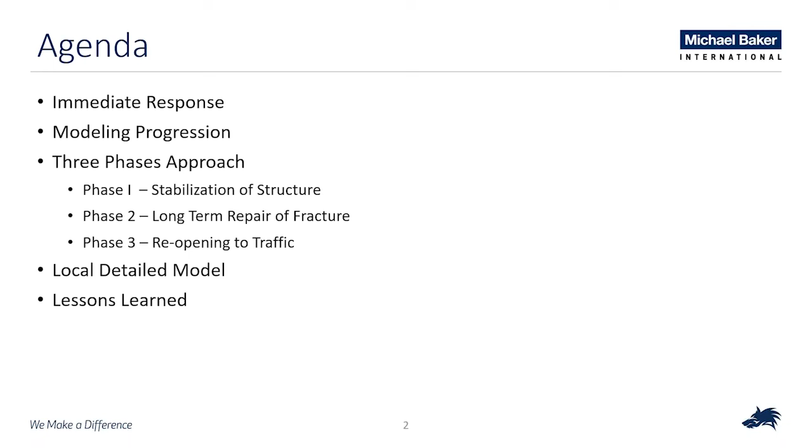So just the short version of the story. The Hernando De Soto Bridge is a 2 continuous span tied arch that carries I-40 over the Mississippi River. On May 11, the hangers and arch inspection team discovered a fracture on the north side of the tie on the Tennessee span. That fracture is about 70 feet west from the middle of the pier.

So if you look at the pictures, the outside web and the top cover plate of the tie are completely fractured. Then part of the bottom flange was fractured. Also on the inboard side, the top cover plate is unzipped from the inside web. Then the cross section of the tie is kind of warped and misaligned.

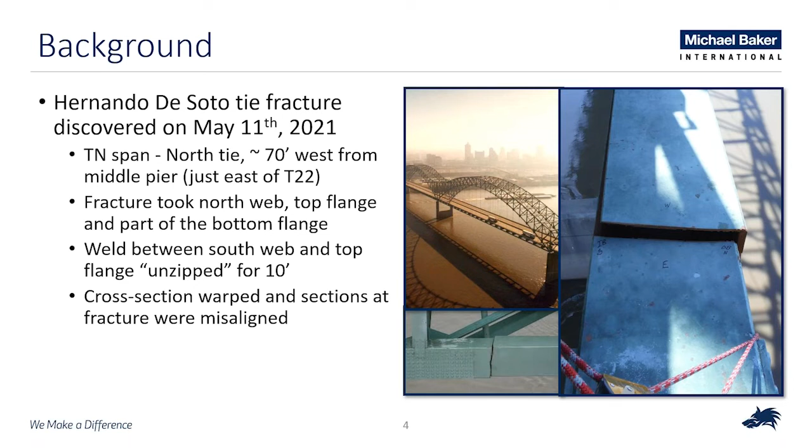So the inspectors recognized the criticality of the finding. They alerted the team of the situation, notified the client, and most importantly, quickly closed the bridge. Although Arkansas DOT is responsible for the inspection side of the contract, Tennessee DOT is responsible for the maintenance and repair of the bridge. So they retained Michael Baker as the engineer of record to do the emergency repair because of our previous experience, and our inspection team was readily available on the site.

So all parties acted swiftly, and the information was coming from different angles. But we managed to establish a three-phase approach to repair this bridge. First is to evaluate the fracture situation, and most importantly, to stabilize the structure. Then phase two is to have a permanent repair of the fracture. And lastly is to inspect and assess if other locations of the tie have the same fractures or not.

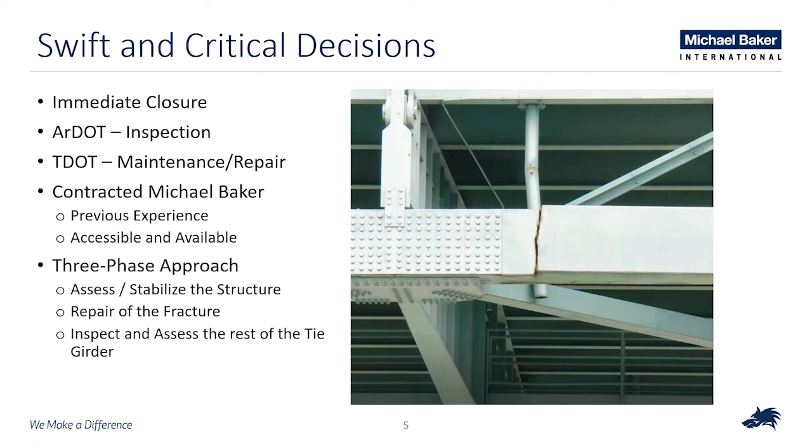So Michael Baker was able to put together an emergency response plan. Actions taken in the first 24 hours were essential to get us headed in the right direction. So we started to gather all the data that we could access: bridge plans, shop drawings, design drawings, and inspection reports, models that had been done, test data, and some old construction pictures.

Then we mobilized the team. This required a large team to work on it. So we have an analysis team, we have the phase one repair team, as well as the phase two repair team. And other activities going on: we have the management keeping continuous communications and meetings with the owners. And we also have the BIM modeling team that develops graphics for PR purposes.

So I just want to give you a sense of how urgent it is. Within a week of timeline, there are so many activities and decisions being executed, including closing and opening the navigational river traffic, and we have the draft plans, we have the CMGC contract advertisement, and selected Kiewit as the CMGC for this bridge repair.

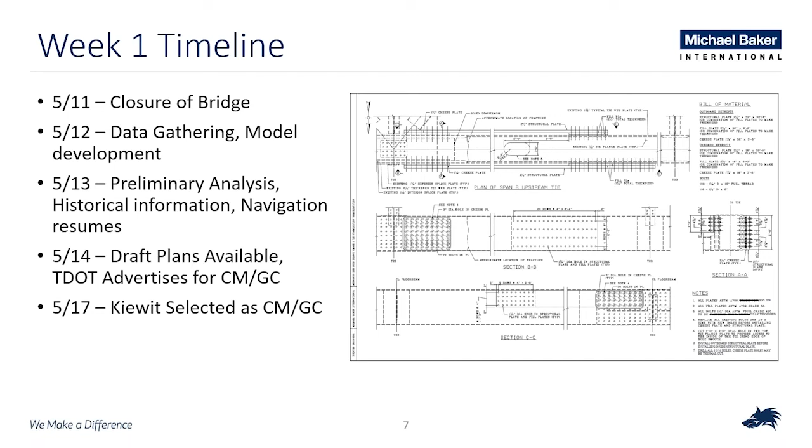As I mentioned, we recognize how aggressive the schedule is, as well as the importance of the work we were doing. So I want to say that this is really a team effort, and analysis is an important piece of the work. Within the analysis team, we subdivided into two different teams. One, we have the MIDAS team, and within the MIDAS team, we have a modeler for the global model, as well as to develop the local model, and also investigate other parametric studies. Then we also have the independent model, to have good comparisons to the MIDAS model to increase our level of confidence in the work we did.

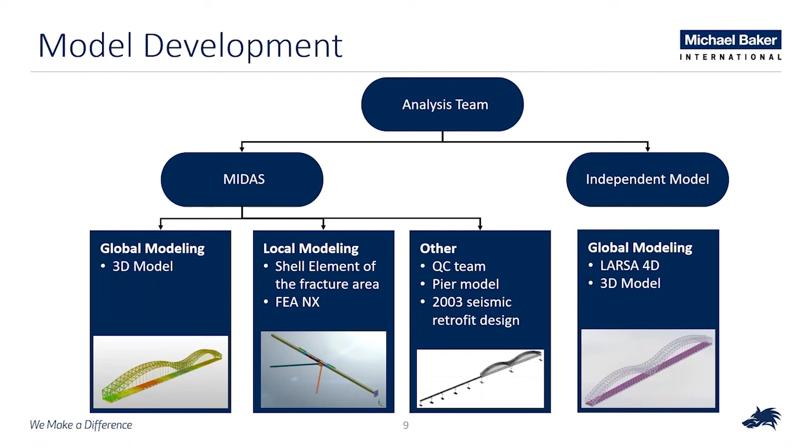So on the model development, we start simple. We start with the 2D model because we have easy access to the existing plans to extract the geometry and input into MIDAS and create the simple 2D model. Starting 2D is good because it's easy for us to troubleshoot and debug the model, just to get us in the right direction. If we have a more advanced model, it's really hard to troubleshoot. Then we use the 2D model to check against the existing drawings and the forces and stresses, to make sure that we are actually capturing the correct behavior of the bridge.

After that, we expanded the 2D model into a 3D model. And we also compared the design drawings with the shop drawings and incorporated any discrepancies between those two sets of drawings into the model. Then we did the steel dead load calibration to reasonably match the total steel weight shown on the drawings. Based on the information we found in the old construction pictures, the bridge was originally constructed with temporary shoring. So we felt that we are capturing this correctly by just turning the gravity on and not doing more complex staging of the model.

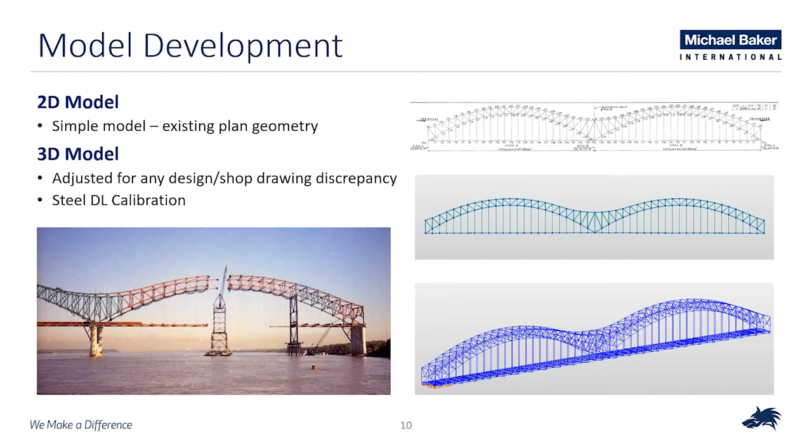The bridge went through a major rehab in 2003. The bearings of the arch were replaced with friction pendulum bearings, and some of the members on the ribs as well as the floor system were strengthened. So at this phase, we had to stage the model to capture those retrofits. And then we recalibrated the dead load of the model to match the total steel weight shown on the drawings.

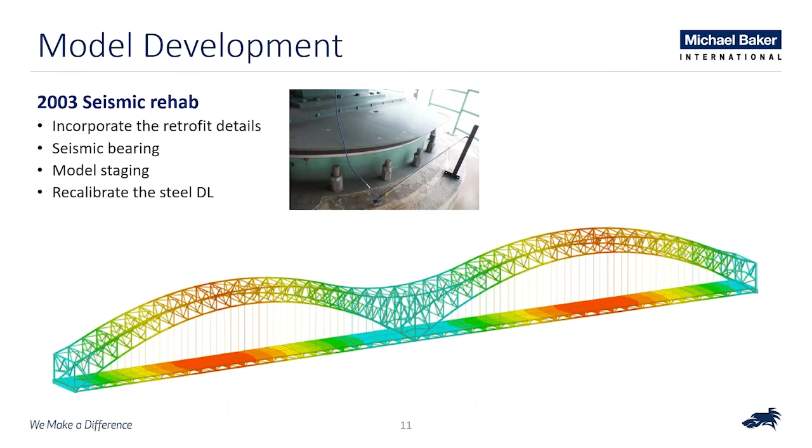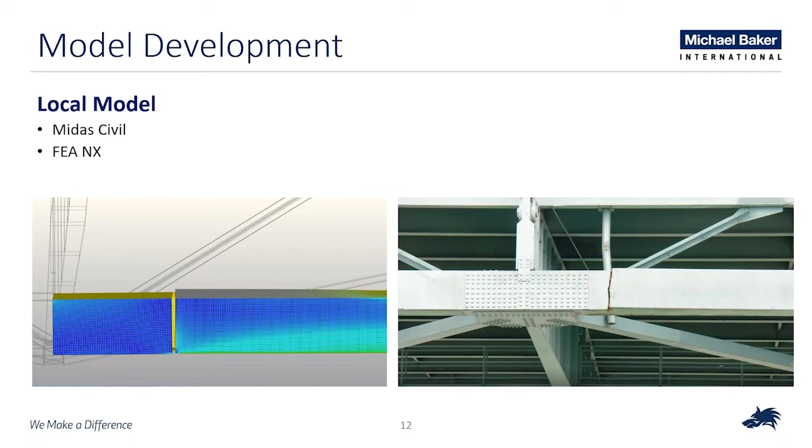Then we also have a local model. We started the local model with MIDAS Civil, but this is a very unique scenario where we hit the limitations in MIDAS Civil. So we had to use FEA NX to do the local modeling, which Francisco is going to talk about. Other than the analysis side, we managed to use MIDAS Civil to export the model into a DXF file for the BIM team to import into their program to do the rendering that was used for PR or media purposes.

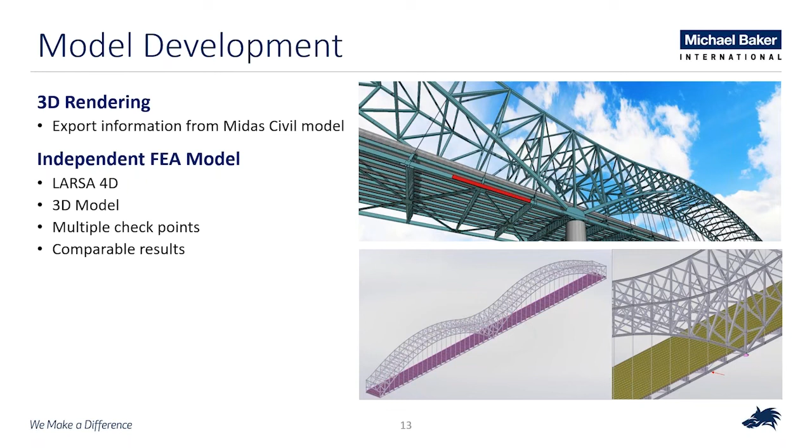I mentioned that we have another team that developed an independent FEA model. The goal is to have the two models running parallel to each other and cross-check each other to give us more confidence in the analysis that we perform. So we had a few checkpoints along the progress to compare the results between the two and reconcile any differences in the assumptions and results. As we know, every program, every model has its own nuances, but we still got very comparable results between the two models.

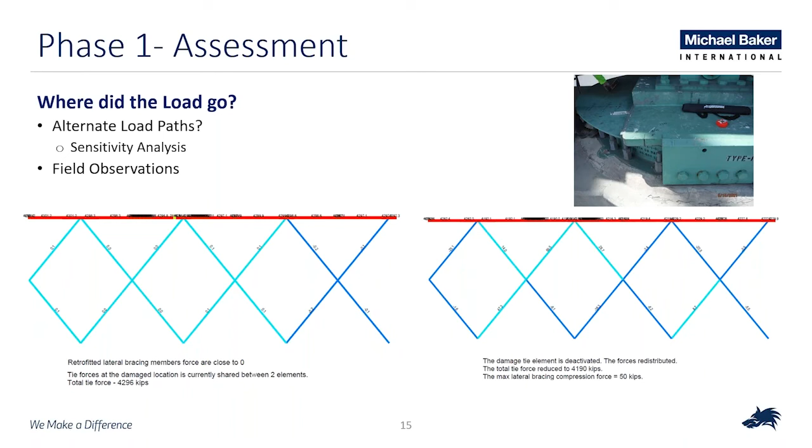So now I'm going to get into the phase 1 repair. In phase 1, we did the assessment to figure out where the load actually goes when the tie fractured. We felt that when the tie fractures, some of the load may go into the floor systems. So we did a sensitivity analysis to evaluate where the load actually goes. Then we also did some field observations, especially on the friction pendulum bearing, to see if the bearing moved or not after the tie fracture.

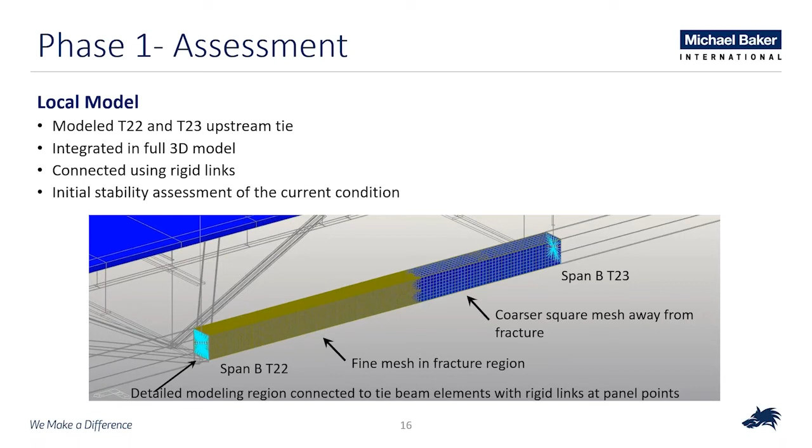Based on what we observed from the initial stability assessment, we can see significant deflections visible in the model that correspond to what we have seen in the field. The deflections due to dead load are not random, where the fracture surface bowed out. That indicated that we captured reasonably accurate boundary conditions in the detailed model, and our material nonlinear analysis of this local model is reasonably accurate as well.

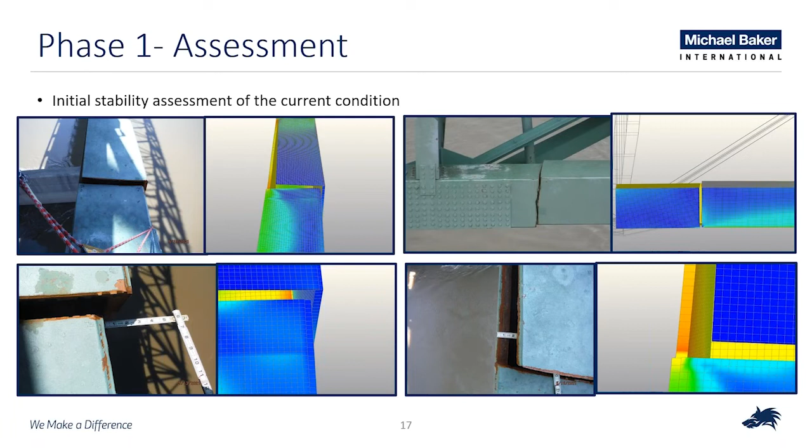So in phase one, the repair is to install a temporary plate over the fractured member, just to stabilize the bridge before the design and construction of the permanent repair.

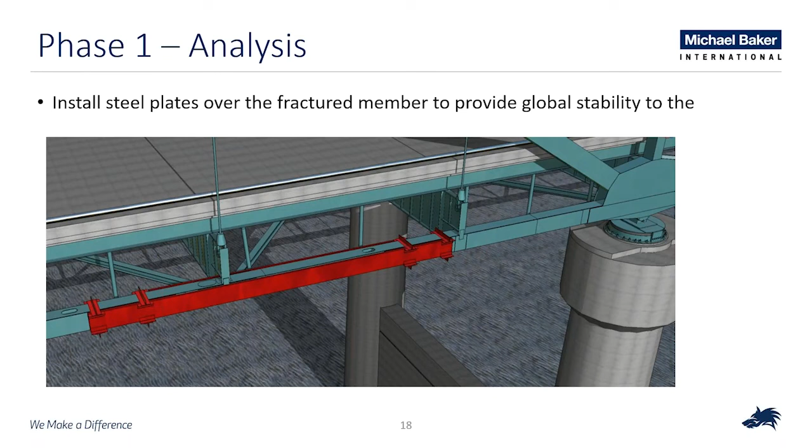In order to facilitate the installation of the temporary plates, the contractor was going to install a working platform underneath the deck on the floor system. So we also added in the platform loading, to make sure the additional load induced into the tie would not exceed the safe load that we determined.

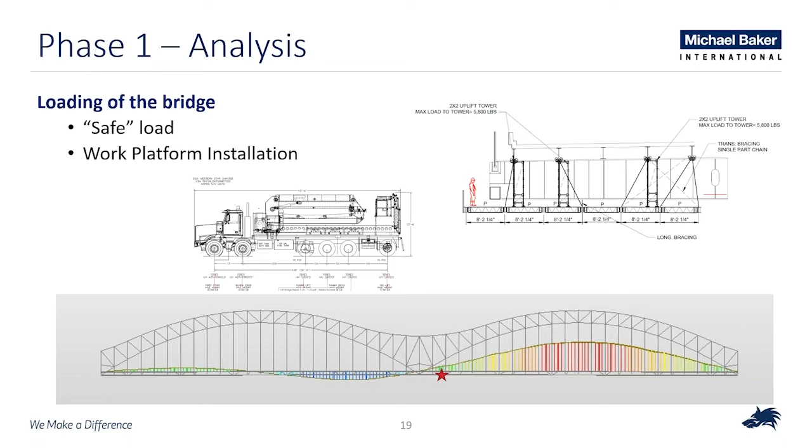Other than that, we did some construction support analysis with the contractor's means and methods to install the plates and how the contractor would like to do the hoisting. Those were all additional dead load analyses that we added into the model, to determine that those loads would not exceed the safe load we had determined.

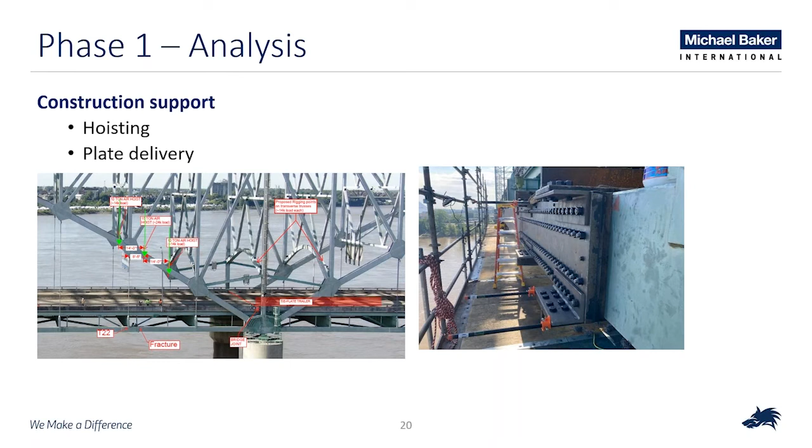Next is the phase 2 repairs. This is when we do the long-term retrofit of the fractured sections. There were a lot of ideas and repair options considered for the permanent repairs, including replacing the whole fractured tie. Unfortunately, we don't have enough time to go through the options one by one, but after working with the owners and contractor, the final option is to plate both sides of the tie girder with the existing tie to remain.

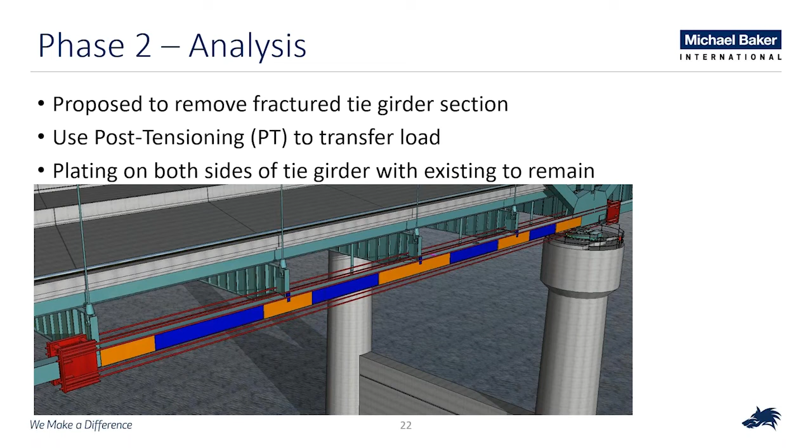The plating starts from panel point T20 to T24, where the fracture is actually located at T22. Post-tensioning was also used to detension the tie and transfer the load from the existing plate to the new plates. So I want to talk a little bit about the design criteria of the plating.

The objective is to post-tension the tie to a reasonable level so that the plating can be installed to the existing tie, and also to restore the fractured tie that warped to its original geometry. To give you some sense of the magnitude of forces on the tie: the tie dead load is about 4,300 kips, and we target to PT about 3,000 kips out of the tie. So then the net stress in the tie is only 30 KSI.

The post-tensioning is also limited by the drag force, which I will explain later. The drag forces are the forces on the tie outside of the post-tensioning operations. The reason we want to do the post-tensioning is to restore the geometry and give everybody a more comfortable environment to do the plating. The new plates have plenty of reserve capacity under the LRFD design.

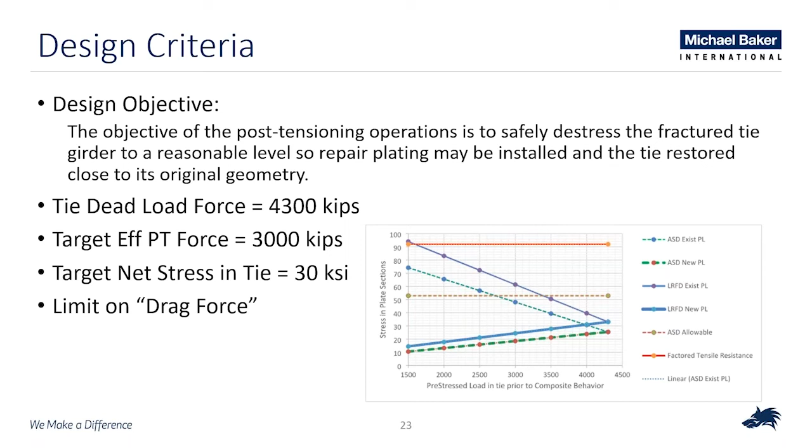So to help the plating design team, we ran the analysis, the dead load and live load analysis, and provided those demands to the plate design team to design the repair.

In addition to that, we also did more construction support analysis. Like we mentioned before, there were more platforms installed on the bridge to facilitate the erection of the plates. We also did some sensitivity study because the lateral bracing is in conflict with the new plate installation, so we had to run the analysis and come up with a temporary bracing system for the contractor to brace the bracing.

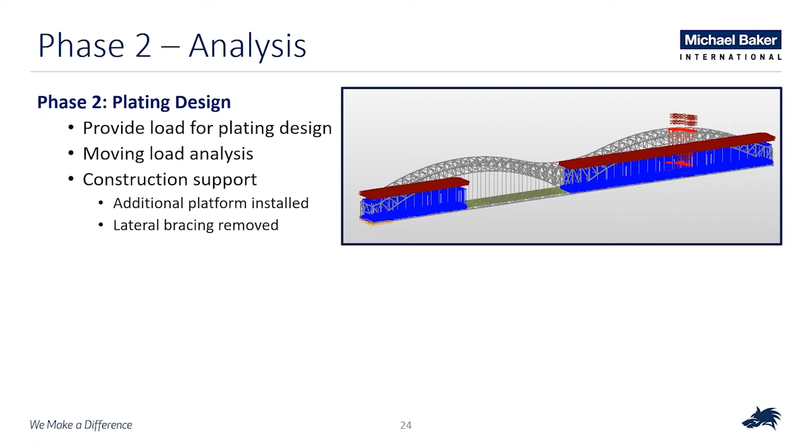So other than providing the loads to the plating design team, we implemented the post-tensioning operations into the model and ran the PT analysis. We modeled the PT rod as a truss element and applied effective PT forces to it. That's where we can look at the drag forces and how efficient the PT is on the bridge.

So using this model, we also developed what we call a PT cookbook. Basically, it is to bound the solutions between the rigid and flexible model, and develop a plan and a chart for the PT field crew to use.

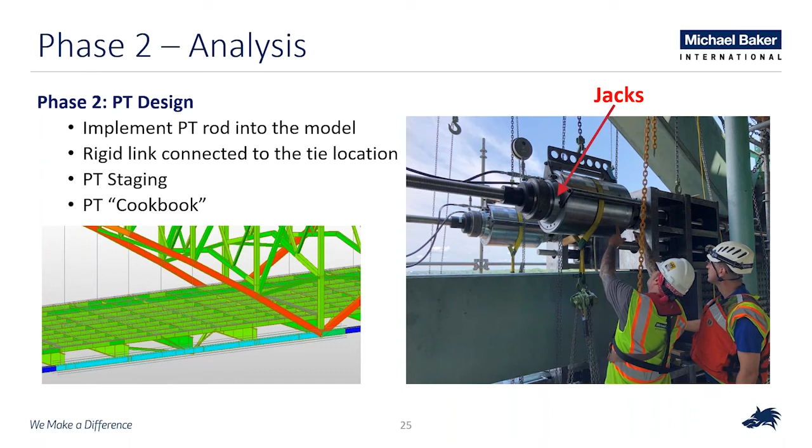In addition to that, we also developed a local model using MIDAS Civil for the PT waler and weldment. The model is to evaluate the stresses of the weldment, just to make sure that the PT operation does not overstress the weldment. So just to give you a comparison of how it looks in the MIDAS model, as well as what actually is in the field.

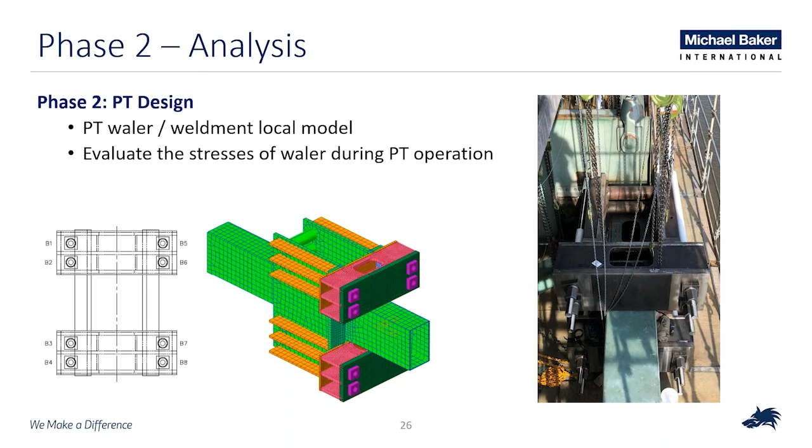So before the PT operation and monitoring, the strain gauges and the dynaforce sensors were installed at the field location of the bridge. The PT operation was actually scheduled on the weekend, if I remember correctly. During the PT operation, the analysis team was on standby mode. We had every model that we use ready, in case additional analysis was required, so that we could quickly make the evaluation if something unexpected had occurred.

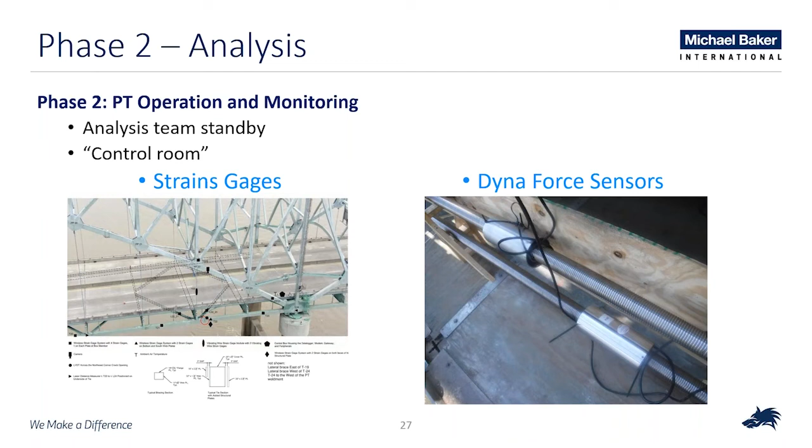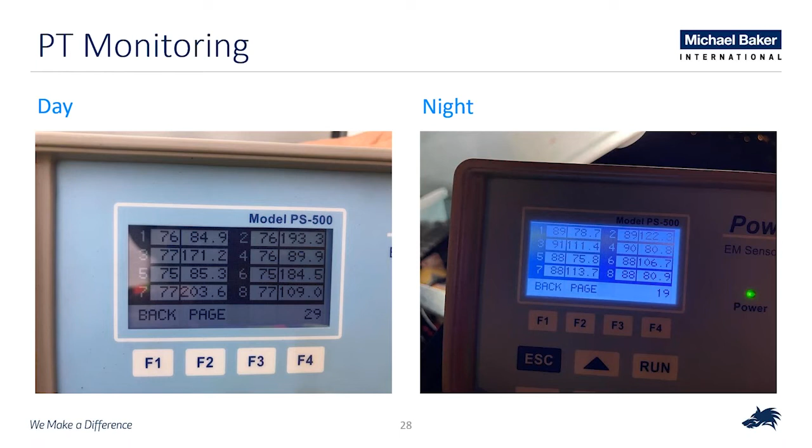So the analysis team acted like a control room, monitoring the strain gauge readings on the tie. You can see these are example pictures of the dynaforce reading of the PT rod. So it looks like we were prepared for everything, but we were not. We under-predicted the stiffness of the structure.

So we under-predicted the stiffness, because in the strength limit state, for the boundary condition, we modeled the ribs as pinned, and the floor system, the floor beam-stringer connections and the floor beam connections, as pinned. But in reality, in the service condition, they have some rotational rigidity.

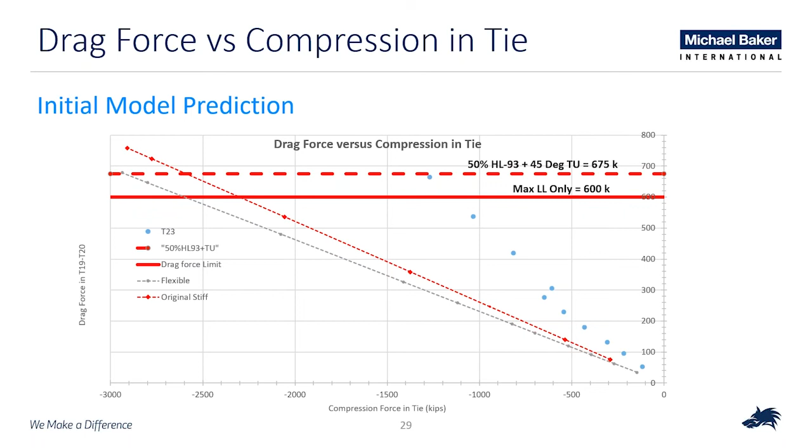So because of that, we quickly adjusted our model to capture the rotational rigidity of the connections, pulled out the results and replotted the graph, and compared to the actual readings in the field, it is reasonably close.

But we had to stop at the 600 kips drag force limit. The reason is that the real, actual load that we think will be on the bridge is 600 kips. In addition to that, the objective was to restore the original section of the tie, and part of the load was already transferred from the existing section of the tie to the new plates. And we met the objective. So that's why everybody agreed with the decision to stop the PT at 600 kips drag force.

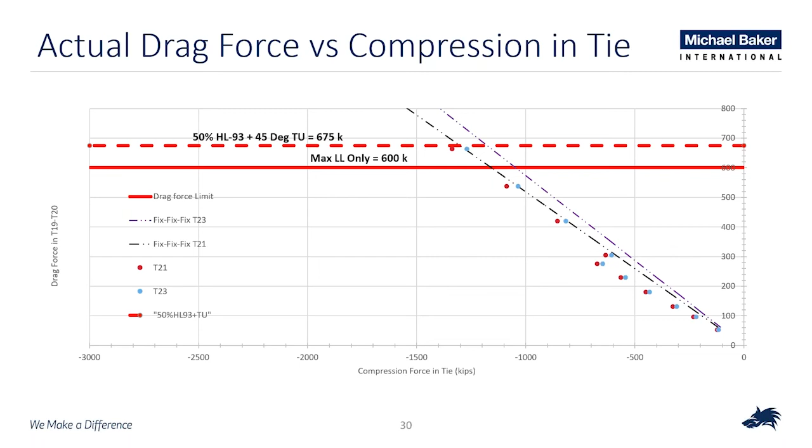So for the phase 3 repairs, the analysis team played a minor role. We basically provided the dead load and the live load, as well as the seismic load, for the plate design team to evaluate and design the plates needed at other locations of the tie that might have fractures. Yeah.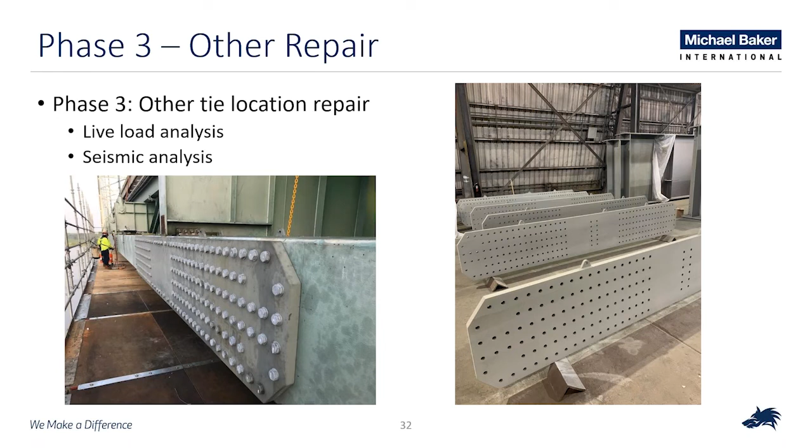And now I'm going to turn it over to Francisco to talk about the advanced level local assessment.

Okay, can you guys hear me well? Yep, we hear you. Okay, well, you can go to the next slide.

Okay, so the reason why a local model was developed was because there were a number of local concerns around the area where the fracture occurred in the tie. The first concern is that there was extensive yielding on the remaining section. A preliminary design calculation estimated that after losing the top and bottom cover plate and the outside web, a typical design calculation would have concluded that the rest of the tie would have failed under its own self-weight. So obviously the tie didn't completely fail, and we were wondering how much capacity was actually left in that intact plate.

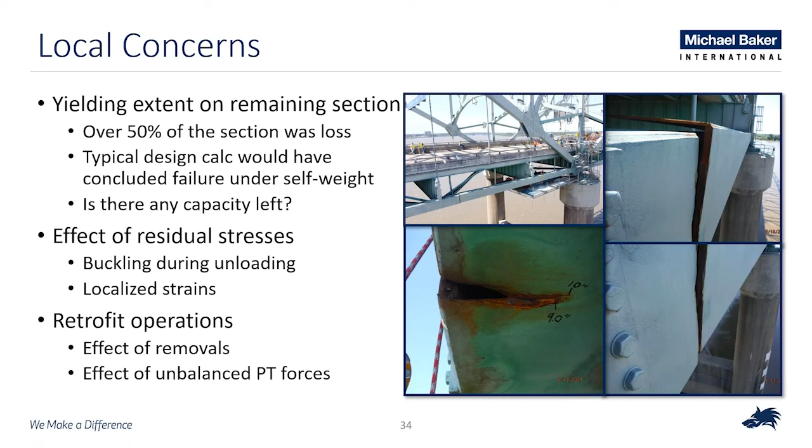And then finally, we also wanted to look at the local effects of the retrofit operations, whether we were going to remove a particular gusset plate, or if we decided that it was necessary to detach some of the bracing from the tie and the floor beam, what was going to be the effect on that area where localized plasticity has happened. And we also wanted to look at what would be the effect of unbalanced PT forces during the operation. So if you want to go to the next slide.

Okay. So why wasn't the local model fully done in MIDAS Civil? Why was FEA NX used? The reason is that we needed an incremental analysis. That is, we needed to include all the construction steps. We needed to start from the scenario where we have the dead load in the tie, and then add the different retrofits, add the different post-tensioning, and see what was the response of the system to it in a sequential manner.

Within that, in order to estimate whether any sort of local instability is going to occur, you need to incorporate large deformation theory, or nonlinear geometry. And you also need to include a nonlinear material model. You need to include the effects of plasticity in order for those residual stresses to form. Within MIDAS Civil, you cannot really successfully do these three things together. So that's why we went to this other tool offered by MIDAS, FEA NX, that allowed us to do this incremental, fully nonlinear analysis. So next one.

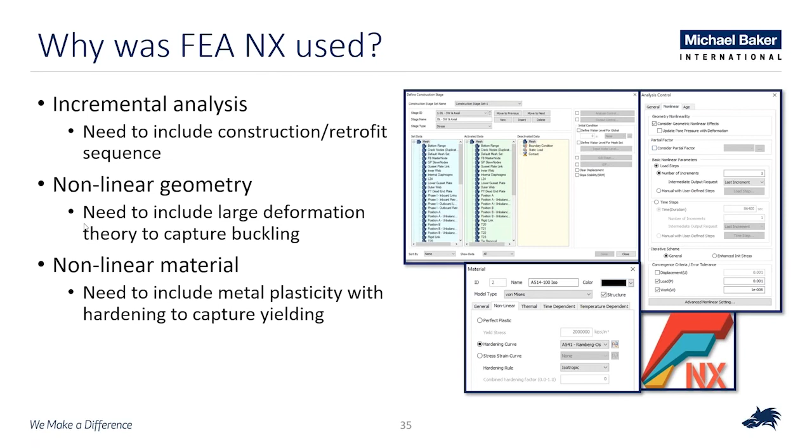So just a little bit of a summary of the geometry. As CY previously explained, the geometry was originally developed in MIDAS Civil and then was imported into FEA NX. After that, we extended the geometry of the local model to include the tie segment between the joints L24 and T20. L24 is at the middle support of the structure, and T20 is 4 panel points away. So that will leave the fracture at T22 approximately right in the middle of the model. We also included the diagonal bracing at T22, including the connection plates and any of the plating installed during the fracture retrofit, as you can see in the lower image.

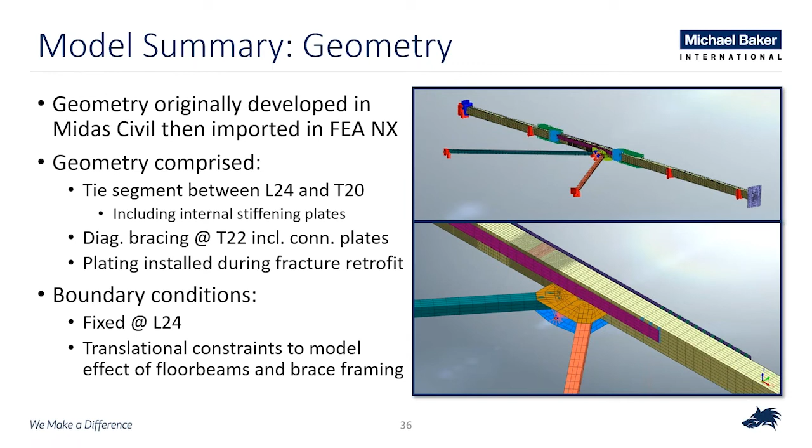Boundary conditions were applied at L24. The local model was assumed to be fixed at L24, which is basically at the support over the pier, and translational constraints were applied to model the effect of the floor beams and other bracing elements framing into the tie away from the fracture location. Yeah, you can go to the next one.

Regarding the mesh, all of the elements utilized are shell elements used to model the plates. There were elastic links to model the bolted connections, and for these elastic links, a linear elastic relationship was used to be representative of the bolt shear stiffness. The mesh size away from the fracture location, the coarser mesh, was 8 elements across the tie height and width, with a mesh aspect ratio less than 5. So basically, no edge of any element is larger than 5 times the narrower edge.

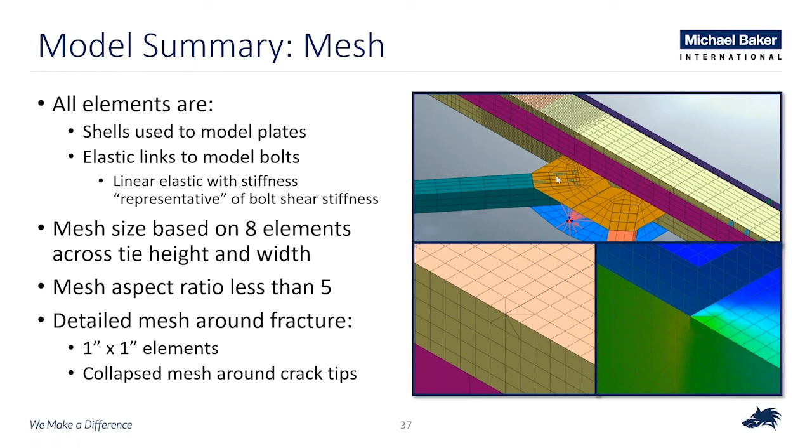And then around the fracture location, the mesh density was increased to about 1 inch by 1 inch elements, and at the corners of the cracks, we did a procedure that is typically used in more fracture-oriented analysis. This is an approximation, but we collapse the mesh around the crack tips. This helps with integration, and if you were to do a mesh sensitivity analysis where you halve or double the mesh, this sort of procedure helps you with convergence around those areas. At the crack tip, you won't get convergence, but within an element, you typically get pretty good results. You can go to the next one.

Regarding the material models, we use isotropic von Mises material, so your typical metal plasticity, J2 plasticity. It's a linear elastic relationship followed by isotropic hardening. For the steel used in the tie, that is the A514 100, also the T-1, we use isotropic hardening. The curve was developed based on a Ramberg-Osgood relationship.

For the rest of the steels, A36, A709 50, and A709 HPS 70W that were used in the retrofits, and then the A36 in the internal stiffening plates, we just use linear elastic with perfect plasticity because there weren't many spots that were getting even that close to yielding.

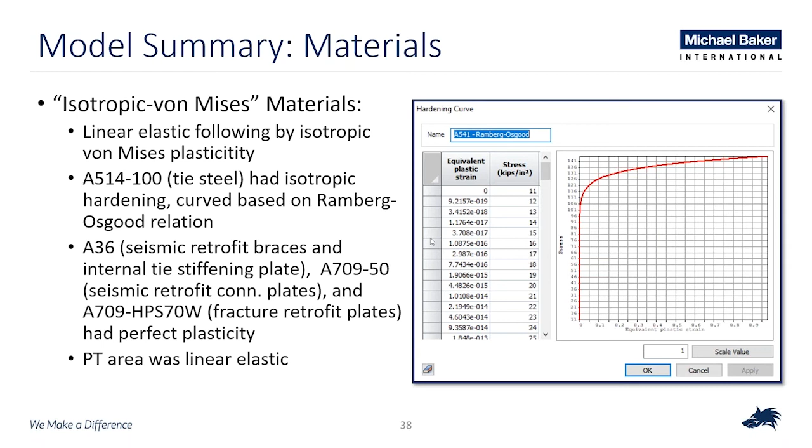And then the area where the PT forces are applied in the model was modeled as linear elastic. Not a lot of detail was really devoted in this local model to this. This was just to make sure that the forces were transferred adequately throughout the model without much distortion to the tie itself. You can go to the next slide.

Okay. So regarding the post-fracture local behavior. The first thing is that after applying axial demands due to self-weight, we were able to corroborate that there was significant yielding developed, particularly on the outer surface of the inboard web plate. At the surface, yielding would have been reached over much of the height of the plate. However, when we look at the through-the-thickness average value, we see that the average stress through the web was actually below yield.

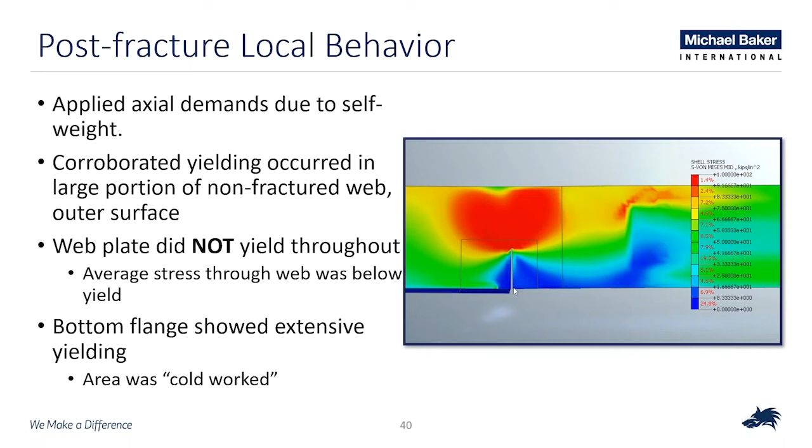If we look at the bottom flange, you can go to the next slide. The bottom flange picked up a very large amount of plastic deformation. It was almost as if the whole remaining ligament on the bottom cover plate had been cold worked; basically plastic deformation was reached throughout that entire remaining ligament. If we go to the next one.

So the first part was to see whether we had any additional capacity in that web plate, and it seems that although we were close to yielding, we still have some additional capacity in the remaining web plate. We weren't really that close to a full section yield or rupturing of the plate.

And the second concern was the formation of residual stresses. We were wondering if a large amount of residual stresses were going to form in the inboard web plate that would create a buckling problem during the unloading, or maybe a localized instability. The analysis removed those axial forces that we put in the initial step, although in practice it's impossible to remove all the axial forces. In this case, we basically wanted to go all the way to see if there were any issues.

What we saw is that very small residual stresses really form on the web plate, and where they formed, they were localized to the areas near the crack tips, or that particular area near the connection to the gusset plate. So the gusset plates are removed, and those are basically the extent of the residual stresses in the web plate.

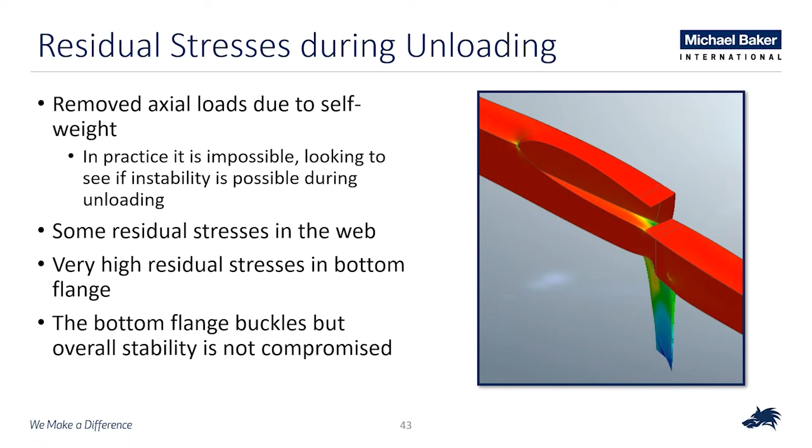Once we reached the conclusion that we could safely unload the tie without any concerning local instability issues, we used this local model to incorporate the different alternatives considered during the retrofit. As Siwei explained before, there was a myriad of different options that we looked at: whether to cut this diagonal, remove this diagonal, leave this diagonal, cut the gusset plates, do we leave the floor beams, etc.

And the main use of the model in assessing the effect of the retrofit operations was to estimate the local effect of the unbalanced PT forces. So if you go to the next slide. We basically created our full incremental PT schedule and added in some unbalanced forces. There were 2 positions for the PT: 8 outer anchorage points and 8 inner anchorage points, positions A and B.

And then you would have an unbalanced force at each one of the corners that was about 30% of the maximum PT load applied at each tendon. The reality is that because the PT was applied 2 panel points away, and there were 2 connection points between the point of application of the PT forces and the location of the fracture itself, those eccentricities that would develop quite a significant moment at the point where PT is applied, because of the boundary conditions that the gusset plates, the bracing points, impose on the tie, will not be very significant at the fracture location.

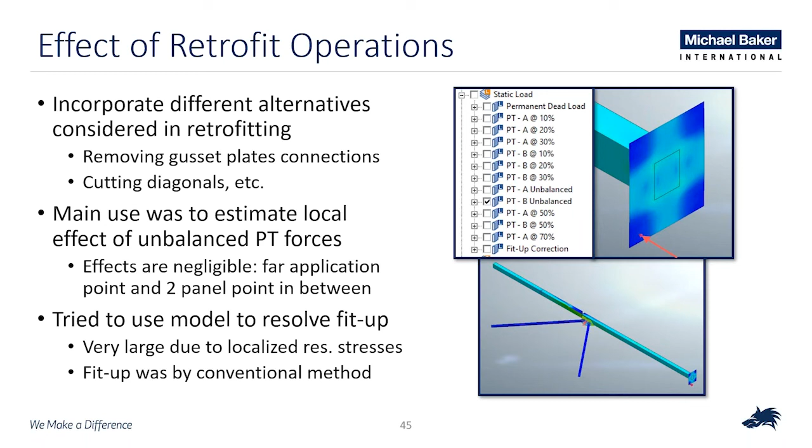The second, if you can go to the other slide, the second use that we gave to this local model was to try to resolve a little bit of the fit-up issue that is encountered after the whole PT operation is completed. Well, the geometry of the tie itself was closer to our working objectives. There was still a little bit of distortion at the fracture location, as you can see in the top image. So there was a necessity to basically square that box.

The problem that we had in here is that if you attempt to do this by the application of localized forces in this local model, because you have that region on the bottom flange that was pretty much cold worked, in order to square the box, what you're doing in the model is basically reworking that region. You are again applying forces to overcome those residual stresses and then re-deform that region. So you end up with pretty high demands for that squaring to be accomplished.

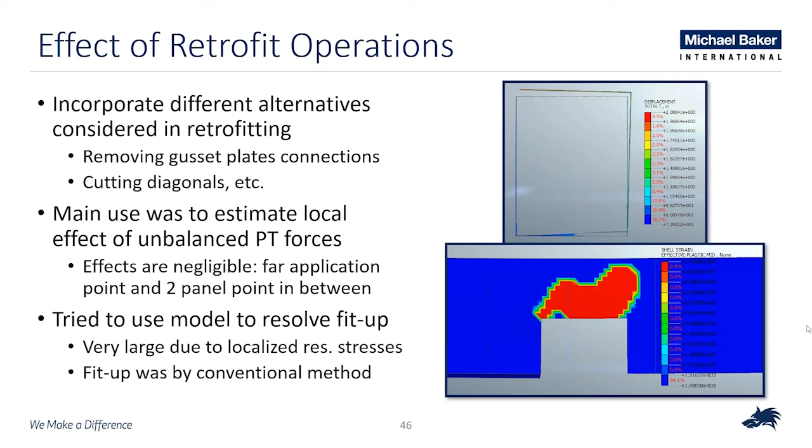So if you can go, here there is a little video of the retrofit sequence modeling. You can see the application of dead load, the removal of one of the inboard plates. Then as we are applying a little bit of the PT forces, the unloading that takes place. So gradually unloading. Then eventually you will see the outer plate starts to buckle out because of the compressive forces. Then it's removed along with the removal of the fracture location.

And the final stage, the final PT forces are applied, which is basically you can model the entire repair procedure for the local model fairly accurately. And in terms of the local behavior, it matched up pretty well with what was observed in the field.

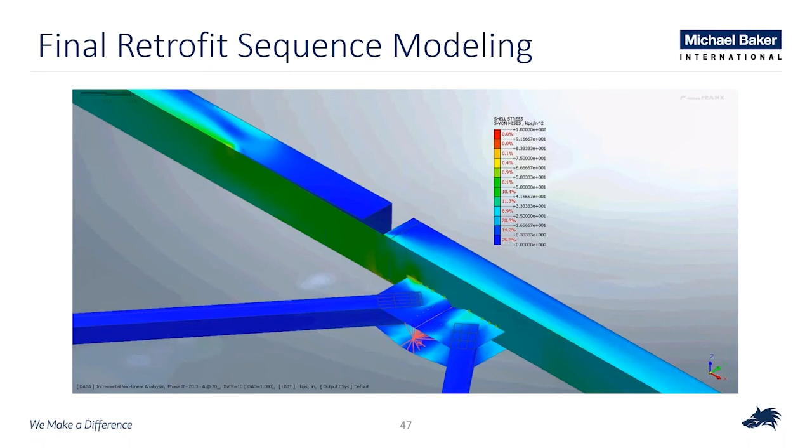So now the lessons learned, the important slide, I guess. The first one is collaboration and communication are extremely important. What we have touched on in here is only the structural analysis part of the problem, and that itself requires a lot of communication and collaboration because we were simultaneously working in like 3 or 4 teams at a time. But there is a whole other side that we didn't touch on that much.

That is all the other teams that were involved in CAD production, in design of the, sorry, not the gusset plate, in design of the tie splice plates, and construction collaboration with the construction folks. So this is a very multi-dimensional problem that requires quite a bit of collaboration and communication.

From our side of things, the main thing is to start simple. The reason number one to start simple is because you cannot afford to carry a mistake throughout this work that forces you to go all the way back to make changes. You have to go very simple, little by little, which is counterintuitive when we are talking about a bridge closure, particularly a critical bridge that we need to open as soon as possible. We want to have answers as soon as possible. But the reality is that you have to start simple and add layers of complexity to this analysis as you need them.

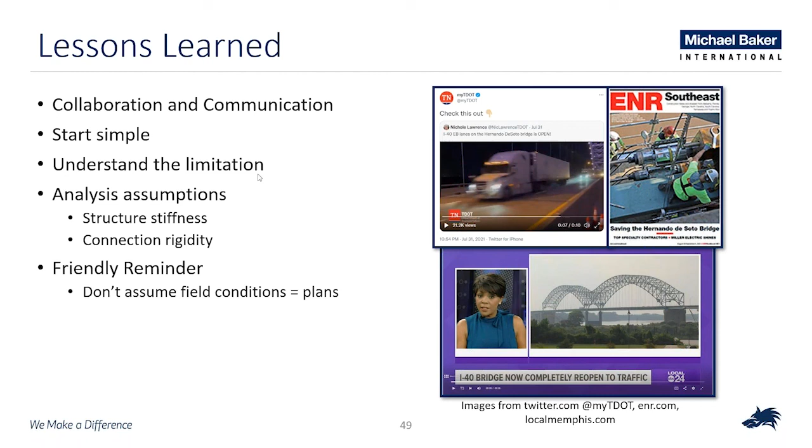No, I think you covered it all really well. You guys hear me? Mm-hmm. Okay, we do have a couple of questions. We are running a little bit late. I don't know if you guys have a couple minutes.

Before, Lucy, you get to the questions, I just want to acknowledge the owners TDOT and ARDOT for their continuous support and confidence in the work that we did. We also had a good collaboration with the owner's rep HNTB as well as the contractor Kiewit. And last but not least, everybody in the Michael Baker team that put in a lot of hours and effort to make this a successful repair project. All right, yeah, absolutely. Thank you.

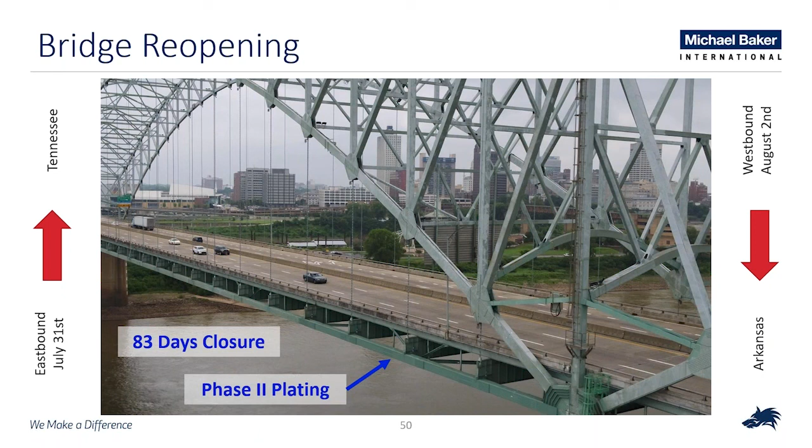And just for information, the bridge was actually fully open on August 2nd, after a 2 to 3 month closure. Thank you. Thank you, guys. I actually was gonna ask if the bridge did open up. I wasn't sure. But yeah, we have a few questions. Do you guys have a little bit of time? We can go over some of them.

Sure. Yeah. Okay. I'm gonna share my screen then. Give me 1 second. Okay, can you see my screen? Can you guys see my screen? Yes. All right, great.

So starting with number 1, what was the reason for the fracture, i.e. fatigue, brittle fracture, overload? Siwei, are we able to answer that? If you're not, it's totally okay. We can skip over it. So I can give a high-level answer that it was actually a weld fracture, the poor weld quality from back in the 60s. But the detail of it, I'm not that competent to speak about, but it will probably be presented in other presentations.

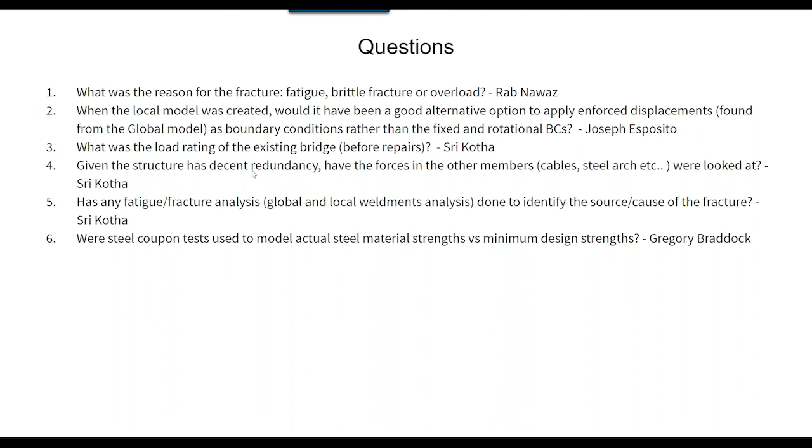So I don't know if we could really say that the structure itself has decent redundancy from an experimental point of view, because we didn't actually have a full failure. But during the process, the global model was used to see whether there were any other issues in other members too.

Okay, next one is, has any fatigue/fracture analysis been done to identify the source/cause of the fracture? Do you mean the fracture of the tie? I'm not really sure. Sri, if it's just a local weldment, right? The local weldment is just a temporary piece installed on the bridge for the PT operation that is removed after the PT and after the new permanent repair plates were installed.

I think that this question number 5 sort of ties with the first one. I think that is a part of the study that we weren't really tasked with, and I would rather have the guys that are in charge of doing that, which is not Michael Baker International. It's another company doing that analysis as a third party, and I don't want to jump to conclusions before they have actually released anything. Right. So Sri did confirm it was the tie fracture, just to confirm that.

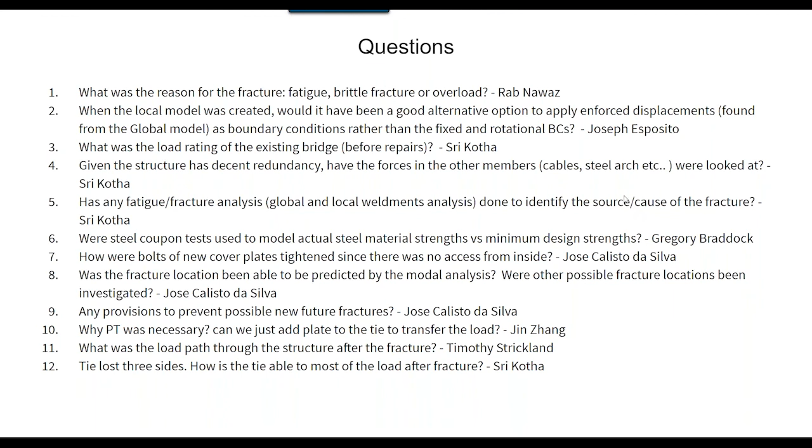And secondly, the contractor expressed their concern about drilling holes over the fracture locations, because it's a non-redundant member. If something happens at that fracture location, the bridge might fall down. So that's why we need to take away some of the tension forces in the tie using the PT.

Okay. And if you remember, originally the plating was only from L22 to L24, and for that reason, not drilling at the fracture location, we are actually taking the plating from L20 to L24. That's another point for your information. Yeah.

Okay, thank you. Two more questions and that's it. So, what was the load path through the structure after the fracture? As I explained before, there wasn't a full fracture of the tie, so there wasn't really a full alternative load path developing. The tie was still carrying dead load.

So there might have been some incidental transfer through the bracing on the floor system, but it's not a full fracture where you had a fully alternative load path developing. Okay, and the last one: tie lost 3 sides, how is the tie able to carry most of the load after fracture? I'm not sure what that means. Sri, if you're still here, can you explain a little bit? If not, we can skip that one.